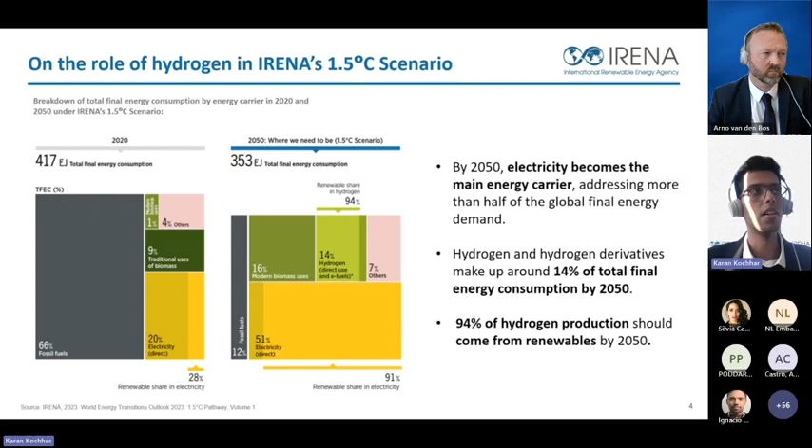However, on the other hand, hydrogen will be essential in some key applications, including the decarbonization of key industrial commodities like ammonia and steel, and in transport, for instance, in international shipping and in aviation, or even providing flexibility through medium and long-term storage to manage power systems. So even if we focus on these key applications for which hydrogen is needed, we have ahead of ourselves a major challenge to scale production at the pace that we will need.

First of all, we need to understand that today hydrogen is still a source of emissions. It is not a decarbonization vector yet. We produce about 100 million tons of hydrogen globally, and almost all of that is produced with fossil fuels with unabated emissions. By 2050, we need to scale that production more than fivefold while making sure that the majority of the hydrogen is green. Just to give you a sense of scale, by 2050, for the production of hydrogen and derivatives, we will need roughly as much electricity as the world consumes today for all purposes, which is roughly equivalent to 21,000 terawatt hours.

In terms of scaling up electrolysis, the order is around three orders of magnitude, from roughly 1 gigawatt today to 5,700 gigawatt by 2050. Therefore, we advise policymakers to be very selective in prioritizing those applications where hydrogen adds the most value.

One key question is whether hydrogen can become cost competitive. And the answer is yes. If the deployment of renewable capacity and electrolyzer capacity happens at the pace and scale needed in a 1.5-degree scenario, then we can see cost reductions which are driven by technological learning, economies of scale, and optimization of supply chain. Under such scenario, we see hydrogen competing with fossil fuel-based hydrogen by the end of this decade in the best locations for renewable energy.

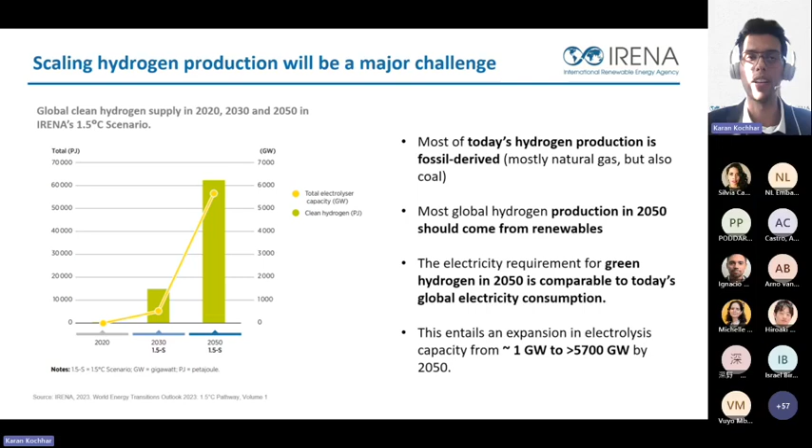The first is that unlike fossil fuels, renewable resources are very well distributed geographically. With fossil fuels, the top 5 countries control roughly two-thirds of the oil and gas reserves, respectively. That is not the case with renewables, and this will have implications for the overall potential trading volumes of green hydrogen and its derivatives. The second insight is that green hydrogen production can become very cost competitive with costs below $2 per kilogram in multiple locations in the most optimistic scenario.

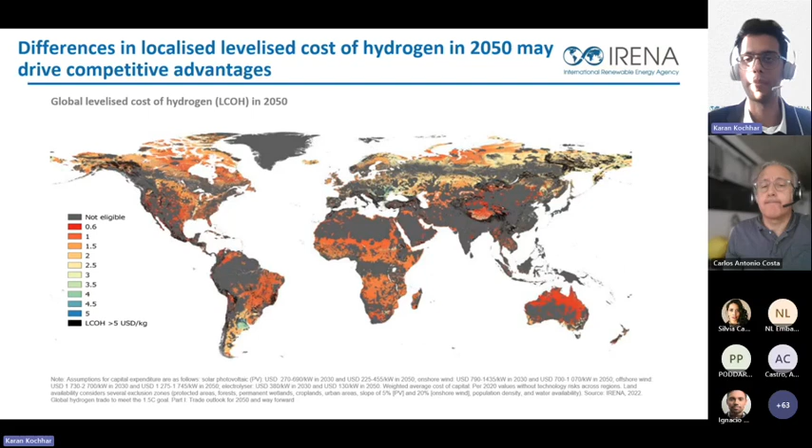Of the hydrogen traded internationally by 2050, a bit more than half, roughly 55%, would be transported by pipeline, mostly retrofitting existing gas infrastructure or rights of way for natural gas infrastructure to reduce costs for neighboring countries. The other 45% would be shipped most likely as ammonia for use in fertilizers or shipping fuel and not reconverted back to hydrogen. In fact, we do not see significant volumes of hydrogen being shipped overseas as hydrogen. Instead, most hydrogen will be produced and consumed close to demand centers.

It is important to consider that the physical characteristics of hydrogen make it technically difficult and economically costly to transport over long distances. Therefore, hydrogen trade will likely manifest more in trading commodities produced with hydrogen rather than hydrogen itself. These commodities include ammonia, methanol, iron, green iron, or synthetic fuels, as the cost of transporting these is relatively small compared to transporting hydrogen and then producing these commodities.

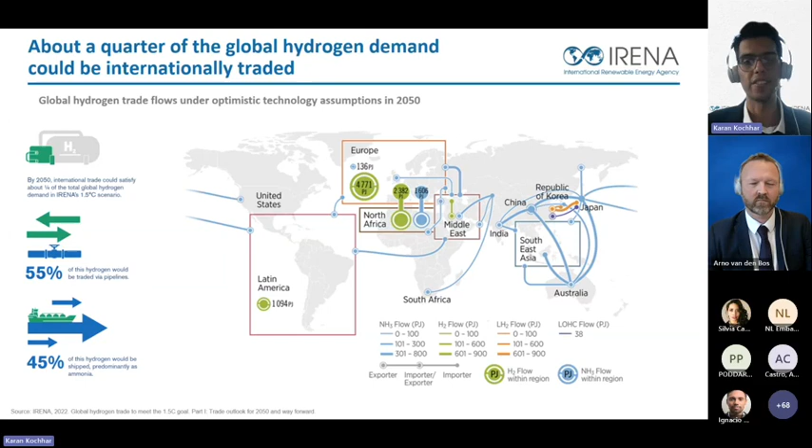And as Karan has shown, we expect most of the trade of hydrogen, so international trade of hydrogen, to happen in the form of derivatives. However, we also see that most of the focus of sustainability certification is actually focused on hydrogen itself. So what I'll do in this section is speak a little bit on what are the issues and the risks that these certification standards and sustainability certification schemes try to address, and how they differ, and how they do this in different ways. So these are some of the challenges for interoperability. And then we'll look a little bit at what conclusions we can draw from that. So if we go to the next slide.

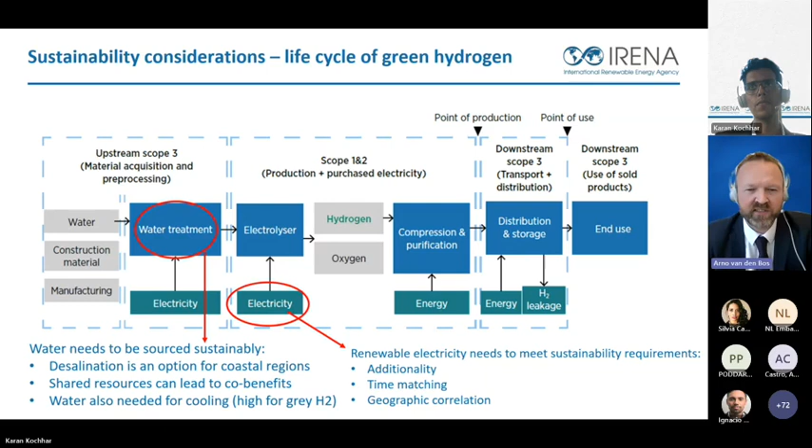Not everywhere, so this is not an issue everywhere, but this is mostly the case in countries that are in transition. And so those we call indirect effects that are undesirable. And to prevent that, policy usually uses three principles called additionality, time matching or correlation, and geographic correlation. I'll come back to those in a minute. If we click next, we have the downstream side.

And then another way of measuring this, which is not shown here, is well to wheel, which takes additionally into account the efficiency of the engine in a car, for example, or a truck. So depending on how you define your scope and which ones of these elements you include in your life cycle assessment, which is the methodology that's used to measure the impact and on which we can set limits, you're going to get different results.

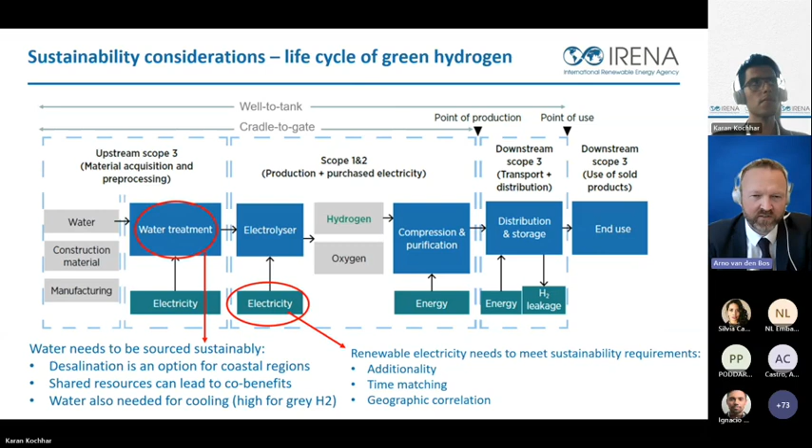And so this also means that you could have, for one particular installation in a particular country, if you use different methods that take into account different components or that have different scopes, you're going to get different results for life cycle emissions, or also called the carbon intensity of your fuel. So that's an important first aspect to consider. Now, if we go next, we'll dive in a little bit more about these electricity considerations. The well to wheel I already mentioned.

So if we dive in a bit more into these sustainability principles for the renewable electricity that's used by an electrolyzer, the first point of additionality, I think I mentioned, means that it has to be demonstrated that new renewable generation capacity has to be installed for the electrolyzer. So in the EU, they ask that you show that you don't use renewable capacity that's more than 3 years old. I think there's a specific date that it enters into generation.

The second component, time matching, means that it's not only important where the electricity came from, but also at what time. If your electrolyzer is running at night or in the winter, then maybe your renewable generation asset is not generating during that time. So what's happening today in Europe, for example, is that because it's quite difficult to match these two initially, to allow for a fast deployment of installations, it's allowed that this matching happens only on a monthly basis, right? So you cannot consume more with your electrolyzer than has been generated by the related assets during that month.

And with time, this becomes more strict, and it is expected that in certain regions this will have to be hourly matching. So really, you can only consume what has been demonstrably generated during the same hour, right? So in some areas, some industry organizations say that this increases the cost considerably. Other studies say that it doesn't really matter, and this depends a lot on how your power system is designed and what are their main components and how flexible they are, essentially.

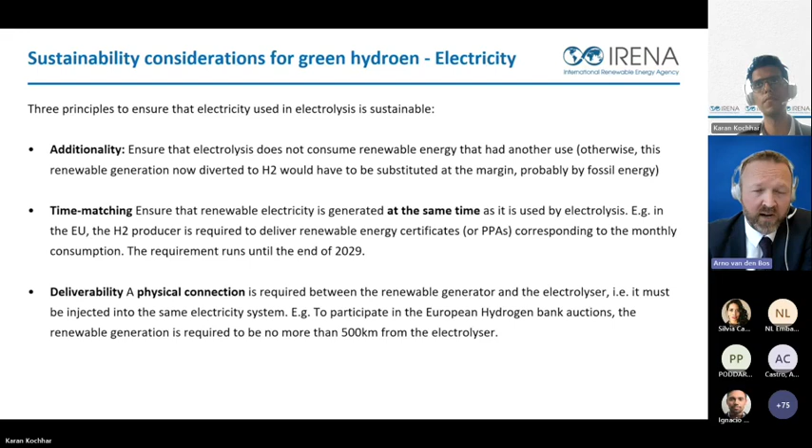So not everyone requires this, but this is one of the requirements that is being translated in different ways in different legislations. So it started with the EU, the US is adopting; they sometimes give them different names, but these are the same principles being adopted. Okay, let's go and look at a supply chain. And the next slide, please, for blue hydrogen.

So blue hydrogen is generated at the core from steam reforming of methane. So methane, which is the main component of natural gas, of course, which is at the center. This may also require some electricity, and of course the steam, which requires energy. All of this generates emissions. And steam methane reforming generates hydrogen, but also CO2. Now, in the traditional gray hydrogen, this is being let escape into the air. And in blue hydrogen, this carbon dioxide is compressed and it's captured and it's stored in geological formations.

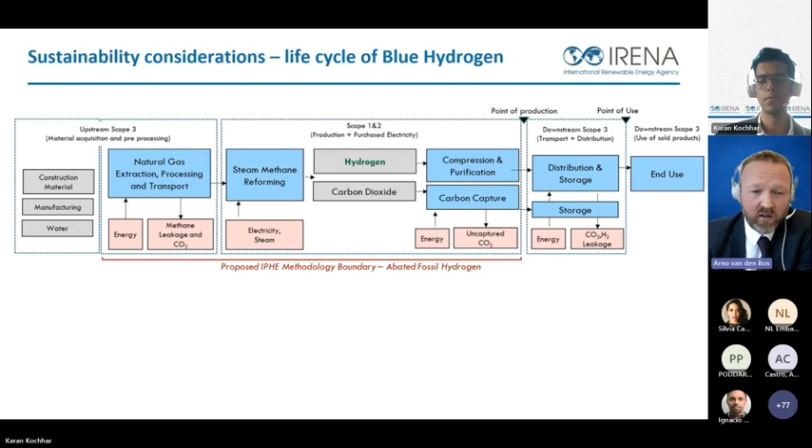However, this process is not perfect. So there are some limits to how much can be captured, and the capture rate actually changes and varies a lot from one installation to another. If we look on the left, if you maybe click the next in the slide, there's a few elements here.

So in the scope, there's again the question of what components are included in the methodology for measuring the carbon intensity. One element that's not always taken into account is, for example, methane leakage that could happen from producing and transporting the natural gas towards the hydrogen production site. And so I would argue that it's important to at least measure that or at least take it into account.

And if we look on the right-hand side, I mentioned the CO2 that is normally captured. However, carbon capture rates vary; we've seen in a report that sources go all the way from 70 to about 90%. So that's a big difference, and this also significantly affects the total carbon footprint of the hydrogen.

And last but not least, downstream, whatever hydrogen is produced needs to be stored, transported, and compressed. This consumes energy, and hydrogen itself could also be leaked. Even though hydrogen is not a direct greenhouse gas, it does produce indirect effects in the atmosphere where it interacts with gases that are greenhouse gases. It has been demonstrated to have negative climate impacts if it's not controlled properly. So it's very important to take this into account.

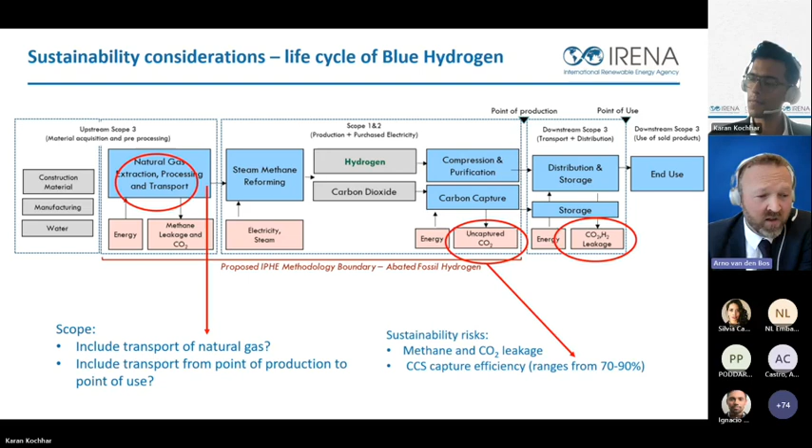So if we go to the next slide, there we come to how do we manage some of these risks. Of course, there are other risks: social risks, and issues with emissions of other materials. Another difference in the tables is that some of the methodologies only measure the emissions of CO2, while others measure methane and other greenhouse gases. So that's also a major difference between the methodologies.

The methodologies are defined into standards, and we define a standard as a formal method or guidance that stipulates how and determines the characteristics of a system; these are particularly important for calculating greenhouse gas emissions. Often standards start on a voluntary basis and are later made mandatory by regulations that say you have to use this standard to calculate greenhouse gas emissions. And sometimes they are born as a mandate, mandatory from the beginning.

In the second column, we have certifications, and in the report we refer to certification schemes. I know that in the US, the word scheme is usually associated with negative practices. This is not the case in the rest of the world. A scheme is simply a system with an owner, usually an NGO, a government organization or even the private sector, that decides what criteria should be included for determining whether something is sustainable. It determines which standards and methodologies are used for measuring it.

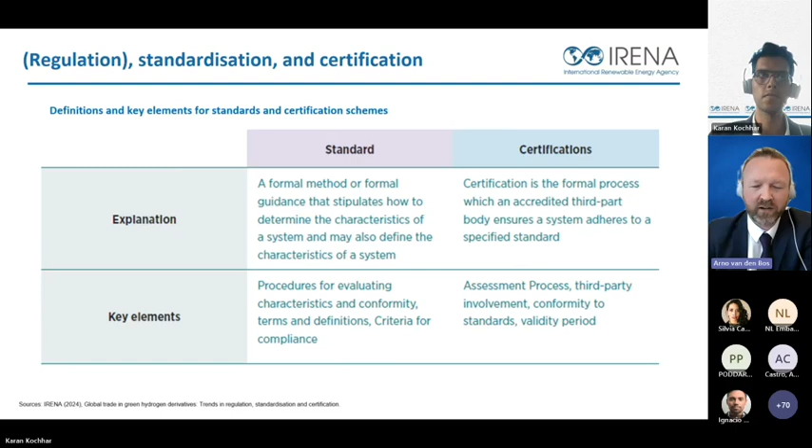Okay, so how do these look now for hydrogen? So first we'll talk a little bit about hydrogen, and that's what we've done here, and then later we'll see a little bit what additional considerations are required for some of the derivatives. And by derivatives, we mean ammonia, methanol, and green steel. And so some of the differences between these standards and schemes, I mentioned the sustainability criteria that have to do with the sourcing of the electricity, or the renewable electricity in particular.

Within the methodologies, I showed there are different scopes that can be covered. And so the scopes determine whether to include upstream emissions, for example, from transporting primary materials. This is particularly important if you transport, for example, LNG, which isn't happening on a large scale yet, but might happen in the future. Whether to include the methane emissions from producing first the natural gas and later the hydrogen. And so the ISO technical specification 19870:2023 actually includes them. And I'll come back to this one because this is a standard that hopes to bring a lot of these methodologies together.

And whether to include emissions from transporting the product, so this is at a later stage of the supply chain, to the point of use, right? So therefore it's important, which gate are we talking about? Is it the output of the factory, or is it the input of an end user? And most jurisdictions will require well to gate, which is up to the point of production, whereas the EU requires actually well to the point of use, which means it needs to account for emissions that are generated from transporting the hydrogen to its end user.

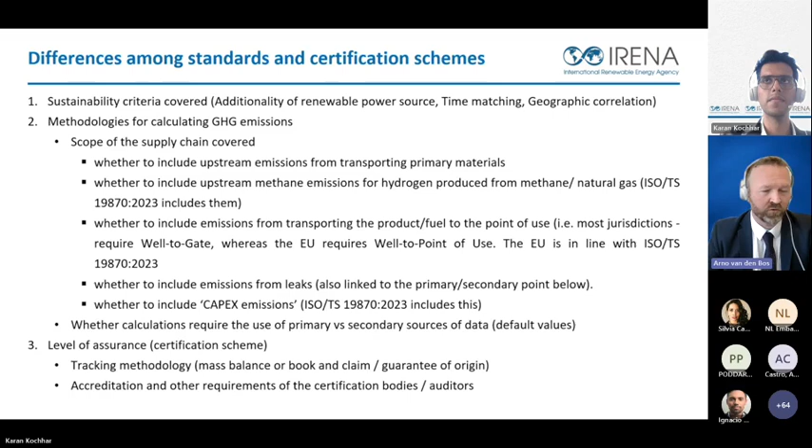So all these things apply to hydrogen, and of course, because hydrogen is an input for the derivatives, all these things are relevant for all the derivatives. However, when we look at derivatives, there are also other considerations to take into account.

So to give you an idea, in the EU, you can sell hydrogen that doesn't meet this requirement. However, then it doesn't meet the criteria as being green hydrogen, and therefore it will not count towards the green hydrogen targets, and you're not going to get any support from the EU countries.

And so if you're going to provide support for these markets, it makes sense that you decide on what you consider to be sustainable. However, the other issue there is, as I discussed before, how do you measure this? And so sometimes we call this the measuring stick.

And so if you want to sell hydrogen in one jurisdiction that requires a certain methodology, the hydrogen produced from the same plant might end up with a different number than if being sold in another jurisdiction, right? Just because they measure it in a different way. So I think this is a first area where alignment or at least interoperability is desired.

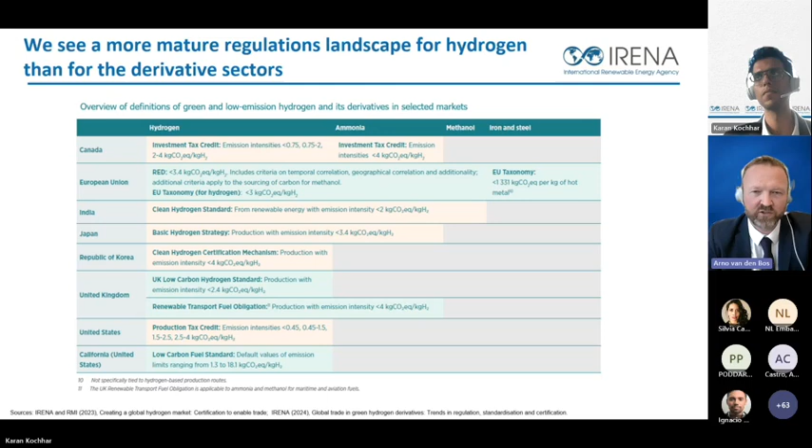And this is a challenge because, as my colleague Karan mentioned earlier, we expect most of the trade, at least international trade, to happen in the form of these derivatives. So if we really want to import ammonia and methanol and ship it around the world, we need to make sure that the certification can meet requirements which need to be in place, and also that there's clarity there to be able to kickstart this trade at an international level.

So if we go to the next slide, please. So very quickly, we have shown here a list of standards and methodologies. Many are from the ISO, but there are many other methodologies that have been determined, either that come from voluntary areas of the private sector, others that come from other countries like Germany and China that have their own systems.

And on the right, we have certification schemes. So again, certification systems that use these methodologies and that usually actually set a minimum threshold and that demonstrate compliance with these minimum sustainability requirements.

Now, the list that we have here changes all the time, right? So with some of these tables that we have, you have to bear in mind that this is a good starting point for a discussion, but this is a dynamic sector, so they may not be up to date very soon.

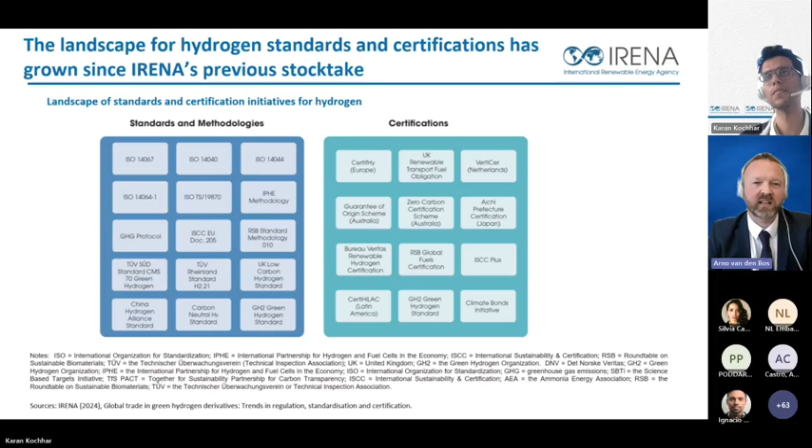And if we look at the next slide, we look at what's happening in the area of derivatives. So here on the top left, we have the different standards and methodologies for ammonia combined with different certifications. On the right, we have standards and certification initiatives for iron and steel. And at the bottom, we have them for methanol. So if we go to the next slide.

So in our report, we have made this for hydrogen, but we've also done this for each of the derivatives. We've created tables where we say first on the standards and methodologies, and then second for the certification schemes. We've tried to compare them, right? So this is really putting out there how these methodologies and systems work, so they are made comparable. So this is a first step, at least in the transparency, in making sure what you get.

And I wanted to take you a little bit through the headers of this table. So the boundary I explained already when I talked about hydrogen, but what happens when you deal with methanol and even ammonia is that a lot of these boundaries initially were set for fuels, but if you use, say, methanol as a chemical input for making plastics or high value chemicals, then of course the scope of your system actually gets expanded towards downstream, right? Because you have a plastic that will be used and that might end up either recycled or burned, etc. So the boundary might expand.

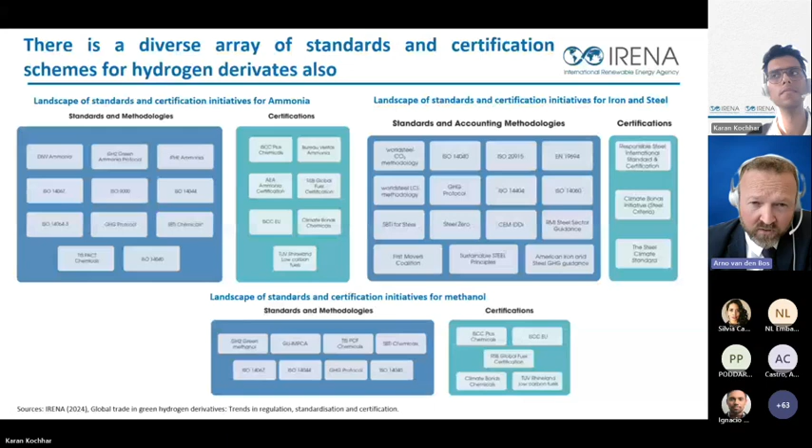And sorry, if we can go one back, because there were a couple of other considerations for the standards. Yes. No, the table for standards. Thank you. So those were the requirements on the source of carbon.

And then the last three have to do with giving credits, and these have to do with allocation methodologies that you use in life cycle assessment. So if you have a process that generates one product, you say all the upstream emissions are caused by this product, right? So it's very easy to say there were so many kilos of CO2 per kilo of hydrogen. However, if you have co-products being generated, then you have to allocate the upstream emissions amongst the different co-products.

So co-products are generated, for example, when you produce ammonia, which actually produces a little bit of methanol and also some N2O and NO2. And so if you emit those into the atmosphere, those are emissions you need to account for in your ammonia. However, because they are in such high concentrations, you might also be able to sell those products. And those products could also carry part of the responsibility for the emissions that happened upstream.

And so whether your certification scheme recognizes that, which is the allotted export of byproducts, is something that needs to be transparent and is not always the case. So you can export, you can have co-products.

A similar allocation issue happens when you export leftover energy, right? If you're producing a lot of heat, you might be able to sell that to a neighbor, and that energy should carry part of the responsibility for the upstream emissions.

And finally, allotted offsets basically determines whether, as a producer of ammonia, methanol, and even green steel, you are allowed to compensate for some of those emissions with offsets, right? So offsets could be carbon removals or carbon permits from a certain carbon market. And these may or may not be included in the methodology for measuring your carbon footprint.

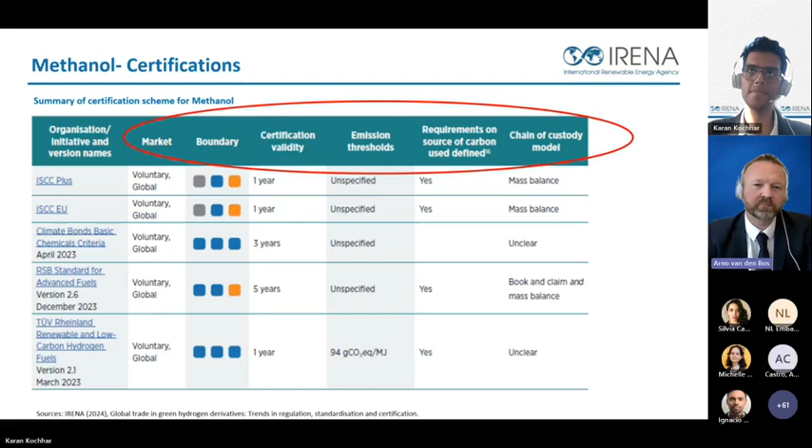Okay, that's a lot of technical talk. Let's go to the next slide. And we can come back if there's specific questions on some of these aspects, and I will leave Karan with the honor of providing some conclusions and recommendations. Thank you so much, Arno.

So the analysis that we conducted as a part of this report reveals two main findings. First, the development of regulations or thresholds for hydrogen derivatives lags behind hydrogen's. We saw that from the table at the start of the section. And from the tables in the latter half, we see that the standards, certifications, even regulations or thresholds specific to hydrogen and its derivatives reveal different degrees of heterogeneity. And working on these issues requires efforts on three main fronts, which I will discuss in the next few slides.

So first of all, as I mentioned in the introductory slides, due to the physical characteristics of hydrogen, green hydrogen trade will likely manifest more in trading commodities produced with hydrogen, such as ammonia, iron and steel, methanol, or synthetic fuel. This is because the cost of transporting these is relatively small compared to transporting hydrogen and then producing these commodities. The production of these commodities can consume significant amounts of hydrogen.

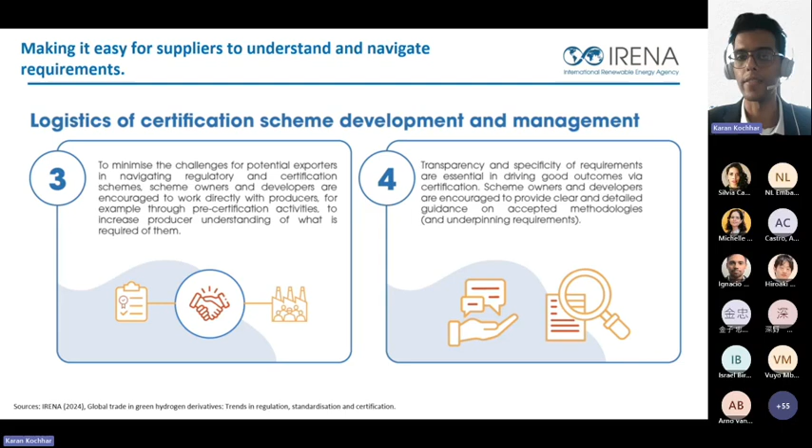And we've already seen some pre-certification trials for renewable hydrogen projects, and such could also be replicated for the derivatives as well. And lastly, the report discusses different requirements between regulatory standards and certification schemes that extend beyond the scope to talking about how they allot credit, what other requirements are for derivatives. So essentially, we're talking about different measuring sticks to measure different things.

And Arno had mentioned that even though there are good reasons for these heterogeneities, for example, through nationally determined or locally appropriate objectives, it is important that these initiatives for green hydrogen and derivatives be aligned as far as possible. Agreement to develop common standards, for example, Sustainable Steel Principles, could also provide a model. The willingness to collaborate was also shown by the COP28 agreement on hydrogen, which indicates a global momentum and will.

Wherever alignment is not feasible, mutual recognition can help harmonize standards and facilitate global trade in these vital commodities. The report highlights these differences and similarities between standards and certification schemes, which could also help on mutual recognition. And lastly, IRENA's collaborative framework on green hydrogen, along with platforms like the IPHE, the International Hydrogen Trade Forum, and IEA's Technology Collaboration Program, can play a key role in coordinating efforts to harmonize these frameworks and ensure mutual recognition.